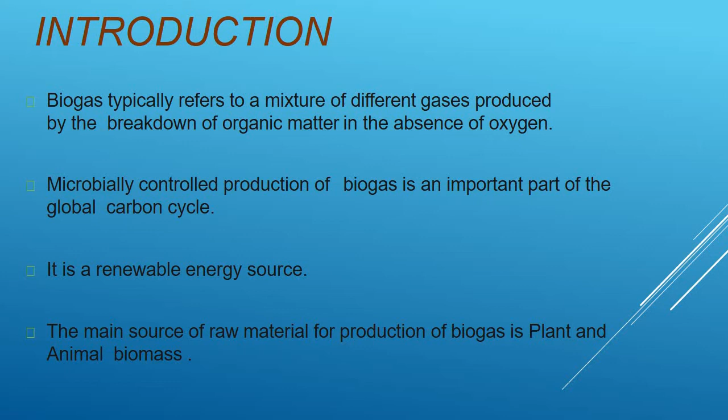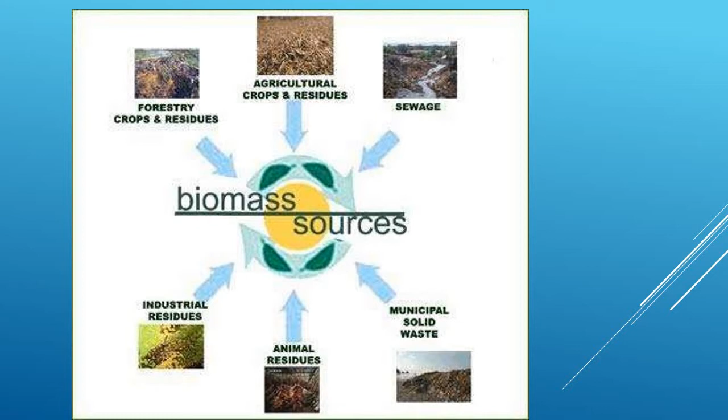So now let us see the different sources for biomass. For the creation of biogas there is a need of biomass, and biomass can be obtained from various sources like forestry and crop residues, agriculture crops and residues, sewage, industrial residues, animal residues, and municipal solid waste. So these are the various sources of biomass, and from biomass we will convert to biogas.

Now biogas is primarily methane CH4 and carbon dioxide gas, and it may have small amounts of hydrogen sulfide, moisture, and siloxanes. So along with methane and carbon dioxide, there is a possibility of small amounts of these gases.

So now you can see typical composition of biogas. The compounds are methane, carbon dioxide, nitrogen, hydrogen sulfide, and oxygen. So apart from methane and carbon dioxide, the percentage of nitrogen, hydrogen sulfide, and oxygen is very less.

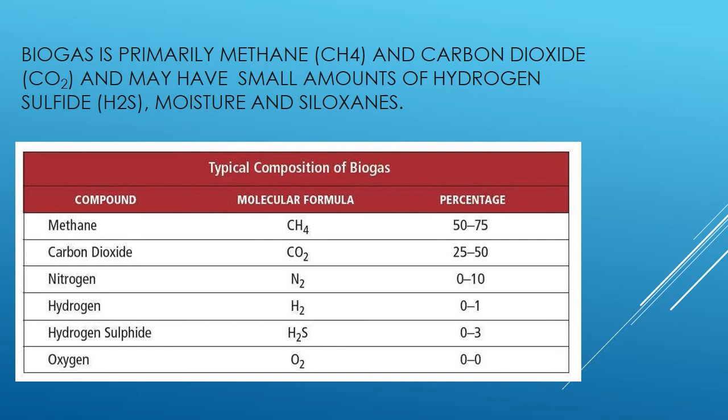So typical gas production from different feedstock. Here you can see various resources like paper waste, bagasse, spent tea waste, food waste, bamboo pulp. These are the various resources from which we get biogas. In the other column you can see typical gas yield in liters per kg. From paper waste we get more liters per kg of biomass.

Then typical methane content is also listed here. So you can have a look here: various resources for biomass, then typical gas yield and typical methane content in the gas.

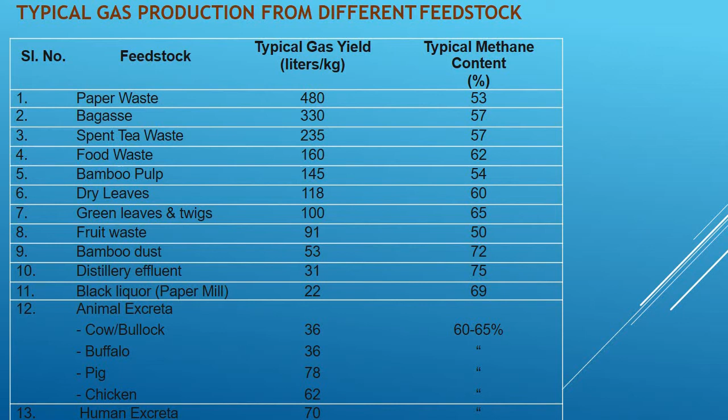So now let us see production of biogas. From carbohydrates, fats and proteins, they are converted into sugar, fatty acid and amino acids, then carbonic acids and alcohols. So these are the various components from hydrolysis, then acidogenesis, then acetogenesis, and then methanogenesis process.

Biogas is produced as landfill gas, which is produced by the breakdown of biodegradable waste inside a landfill due to chemical reactions and microbes, or as digested gas produced inside an anaerobic digester. So biogas is produced in 4 steps: hydrolysis is first, second is acidogenesis, third is acetogenesis, and last is methanogenesis. These are the various processes, and after this 4th stage we will get methane gas.

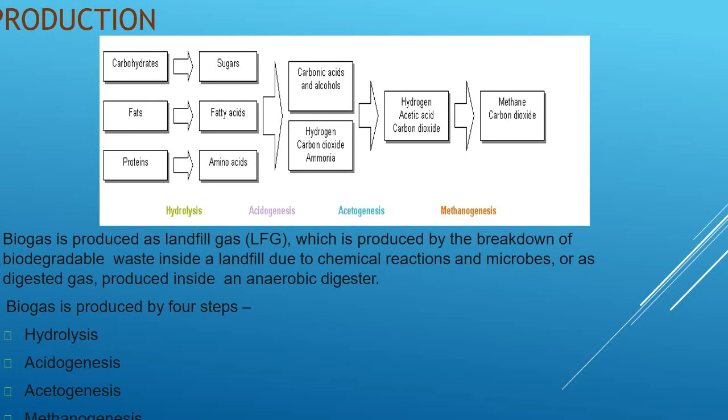Production equipment: the main parts of a typical biogas plant consist of the following components: inlet, digester, gas holder, and outlet. There are different types of biogas production plants. The main 2 types are as follows: first is fixed dome plant, and second is floating drum plant. These are the 2 plants from which we get biogas.

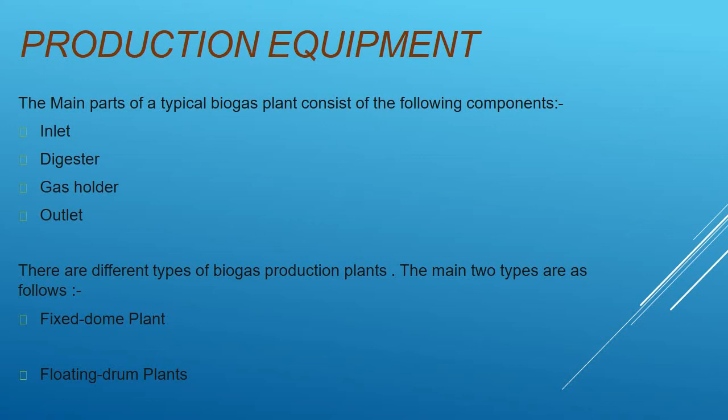So let us see the first type, that is fixed dome type. Here you can see the construction. A fixed dome plant consists of a digester which is fixed, and a non-movable gas holder which sits on top of the digester. So why is it called fixed dome? Because everything here is fixed, meaning the dome and this holder are fixed. That's why it is called fixed dome.

So here from this inlet, slurry of cattle dung plus water is dropped. This is the mixing tank, this is the slab cover, and under this slab cover everything is here. You can see the biogas plant is under this slab cover. This is the ground level, this is the inlet chamber, and the dung and water mixture will come here.

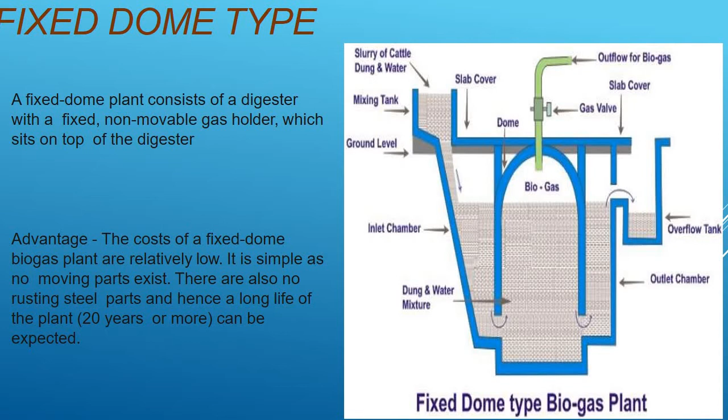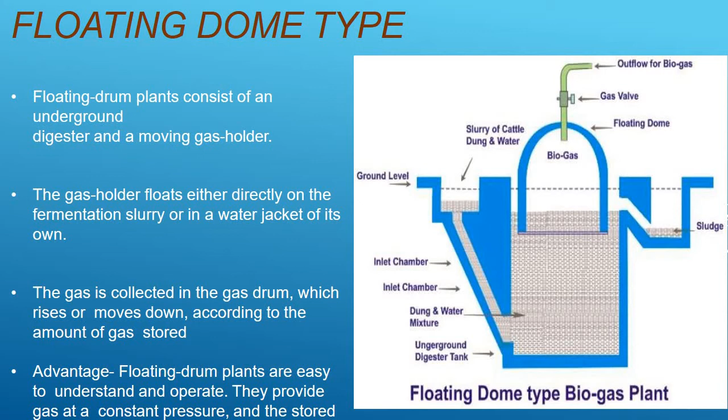Now let's see processing of biogas. The scrubbing of the biogas is done in order to remove impurities generated during the digestion process, such as CO2 and H2S, that is hydrogen sulfide. So CO2 and hydrogen sulfide should be removed from the methane gas or biogas. The biogas goes through a cleaning process and becomes biomethane. A simple method for hydrogen sulfide removal is utilizing steel wool in a glass bottle.

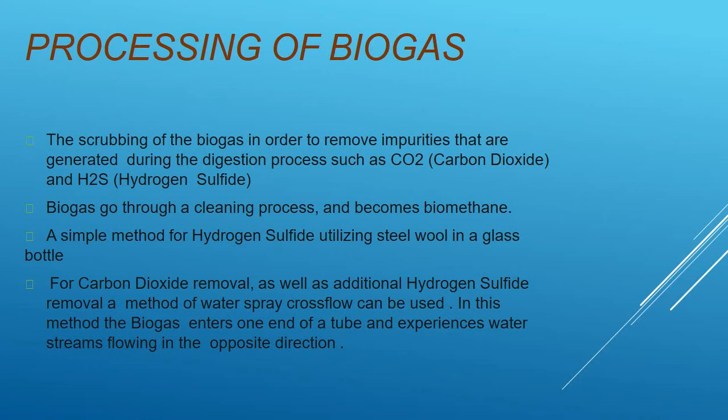For carbon dioxide removal, as well as additional hydrogen sulfide removal, a method of water spray cross flow can be used. In this method, biogas enters one end of the tube and experiences water streams flowing in the opposite direction. So the biogas produced from the plant is passed through the water stream, so that carbon dioxide and hydrogen sulfide are removed from the biogas through the water stream or water spray.

Benefits of biogas: it is an alternate energy source, the residue is used as fertilizer, it requires only locally and easily available material for construction, it controls pollution, little operational skill and maintenance is required, and it results in rapid fall in disease.

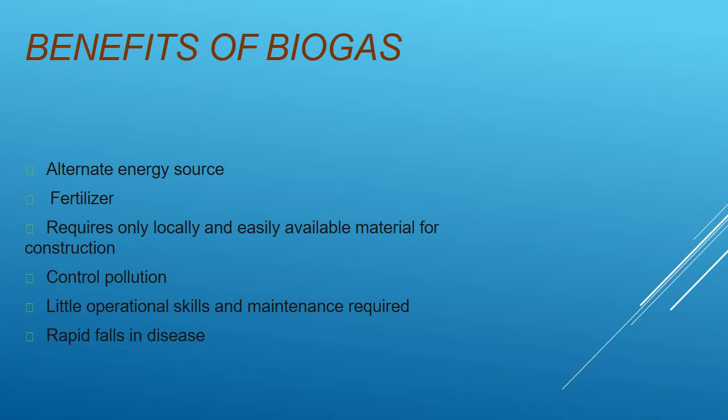Advantages of biogas as a fuel: it has high calorific value, it is a renewable resource of energy, it is non-polluting, it reduces landfills, and it is economical technology.

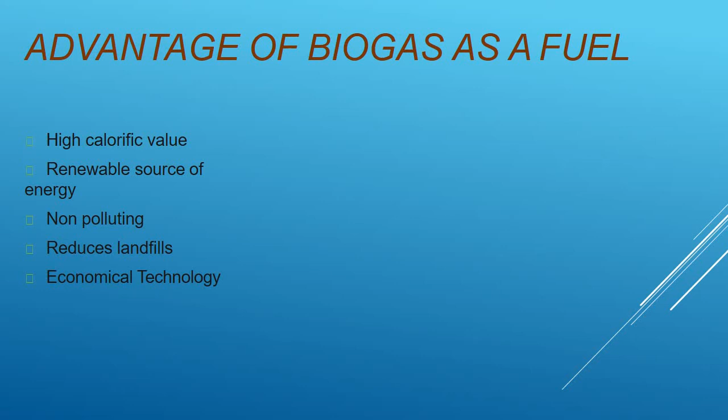Now, limitations of biogas. Biogas can be explosive when mixed in a ratio of 1 part of biogas to 8 to 20 parts of air, so it becomes dangerous when mixed with 8 to 20 parts of air. Biogas leaks smell like rotten eggs, because hydrogen sulfide is released whenever there is a leakage.

It is not feasible or attractive on a large scale, little technological advancement is required, and biogas contains impurities and cannot be easily stored. So these are the limitations of biogas.

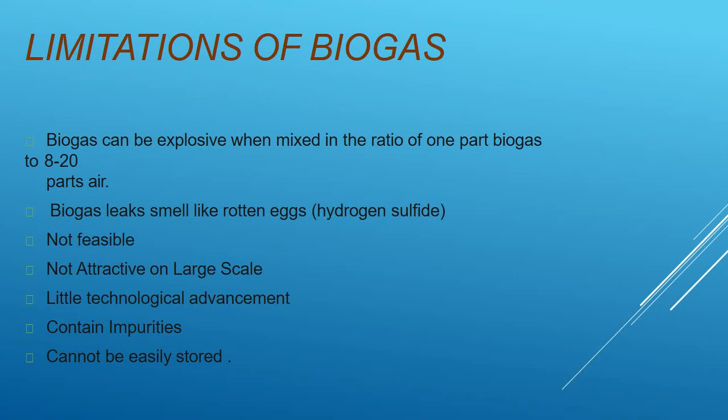Various applications: biogas as grid injection, biogas in transportation, and use of carbon dioxide and methane as chemical products. So this is a biogas train which is used in Sweden.

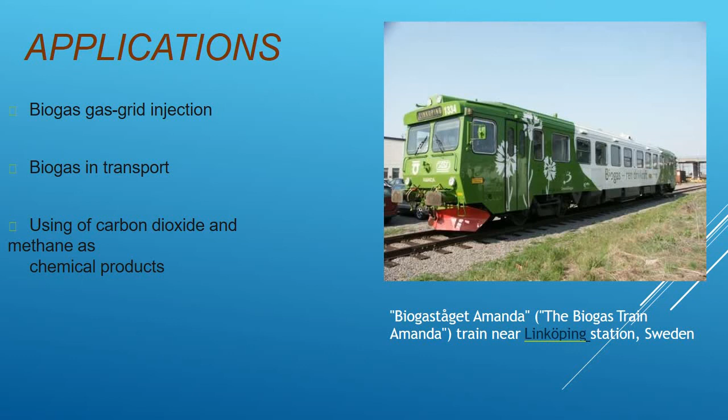Let us see the Indian scenario of biogas. India has installed around 4.75 million small scale biogas plants. In rural areas we can see various biogas plants. India's potential maximum number of biogas plants has been estimated to be 12 to 17 million. Mainly biogas is produced based on dairy manure as feedstock, and thus it is also called a gobar gas plant. In the last 2-3 decades, research organizations with a focus on rural energy security have enhanced the design of the system, resulting in newer efficient low cost design.

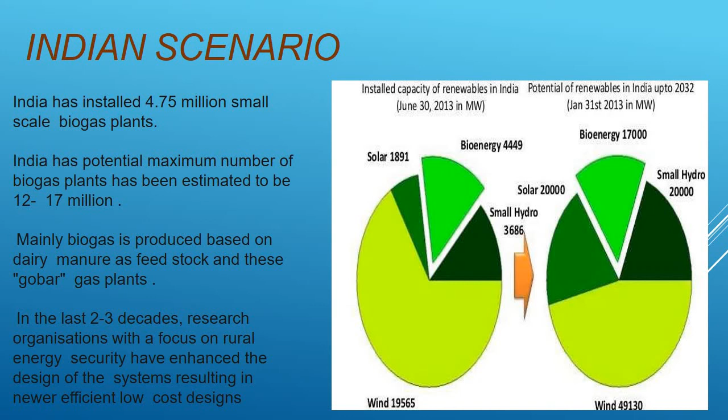India has additionally commissioned 158 projects under the biogas based grid power generation program, with a total installed capacity of 2 megawatts. The National Biogas and Manure Management Program has been implemented in our country since 1981-82 for promotion of biogas plants based on cattle dung.

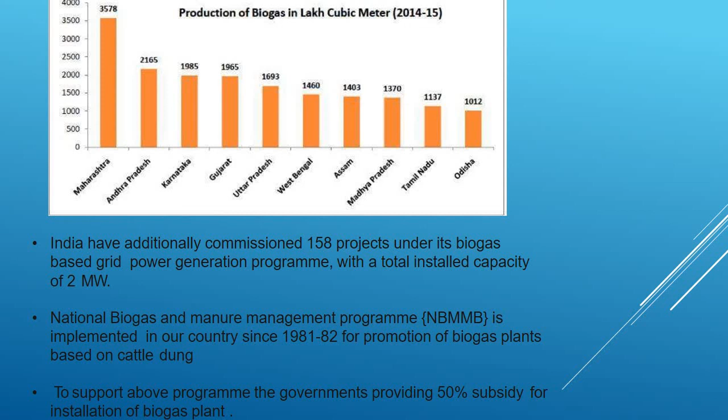To support this program, the government provides a 50% subsidy for installation of biogas plants. You can see a 1 megawatt power project based on cattle dung installed in Punjab.

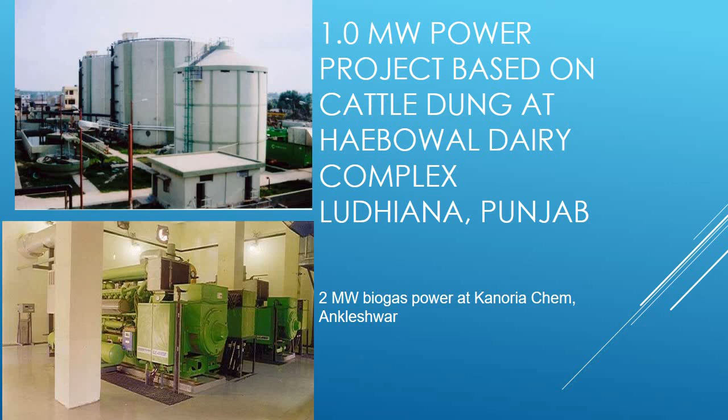Let us see the global scenario. In 2003, United States consumed 147 trillion BTU of energy from landfill gas. As of September 2013, there were about 130 non-sewage biogas plants in the UK. Most are on farm, and some larger facilities exist off farm which take food and consumer waste.

Germany is Europe's biggest biogas producer and the market leader in biogas technology. In 2010, there were around 5,905 biogas plants operating throughout the country.

In various regions, depending upon the size and location, a typical brick-made fixed dome biogas plant can be installed at the yard of a rural household with investment between $300 to $500 in Asian countries, but up to $1,400 in African context. A high quality biogas plant needs minimum maintenance cost and can produce gas for at least 15 to 20 years without major problems or reinvestment, so it is cheaper.

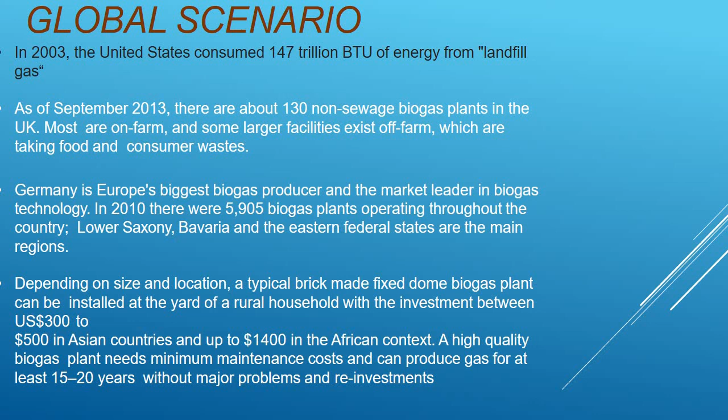So this was about the Indian scenario and global scenario in case of biogas. Conclusion: although renewable energy power generation is a genuine clean development success story, there are some problems that need to be addressed to make the industry sustainable and self-supporting. Biogas offers a vast set of benefits. Except for India and China, in other developing countries, the proportion of functioning biogas plants is less than 50%.